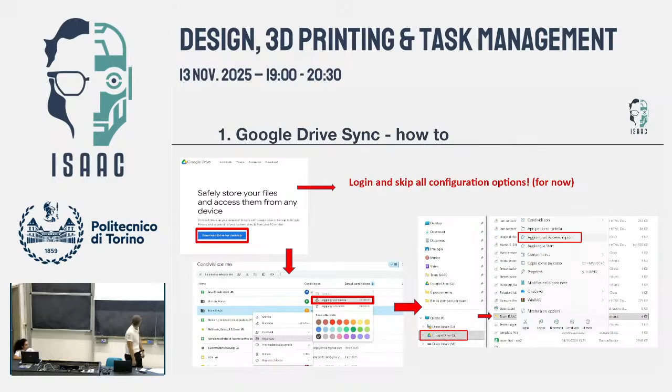Now that after this short introduction, let's talk about the mechanical design, what you're here for. I will leave the floor to Vittorio Giulimondi, who is the head of the mechanical department of the team. He has 2 years of experience, and we will try to explain something about mechanics.

Hello everyone. The idea behind this class was to help our new members, especially in the mechanics area, to understand a few basic concepts about working in a team in general and about designing for robotics, and also with a particular look at the 3D printing section.

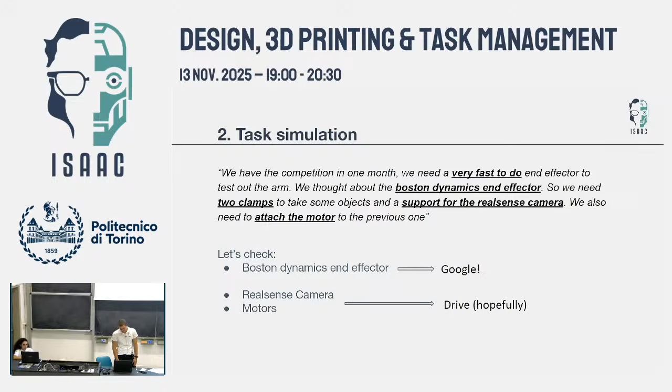So, why are we actually doing this today? As we know, Politecnico lectures have a lot of theory in them, much less practice. So once we get out of those lectures, we usually do not know how to solve anything. We encounter a task which might actually be difficult in the real world during your working experience in the future, and you will see that you actually do not know what to do. And that is perfectly normal, because no one has ever told you how to do this.

One example we always see is that once someone new comes into our team and starts designing parts, they never take into account the electronics part. As mechanics, we do not care about electronics most of the time, but it's actually essential, because without electronics, our robot will just not move.

So what I want you to get from this class today is for sure some tricks about SolidWorks that we will see, maybe ones they haven't shown you in the only course you do as a mechanical engineer or industrial engineer in general. I also want to show you what the actual workflow is that anyone has to follow to go from an idea to an actual product that you can print and use.

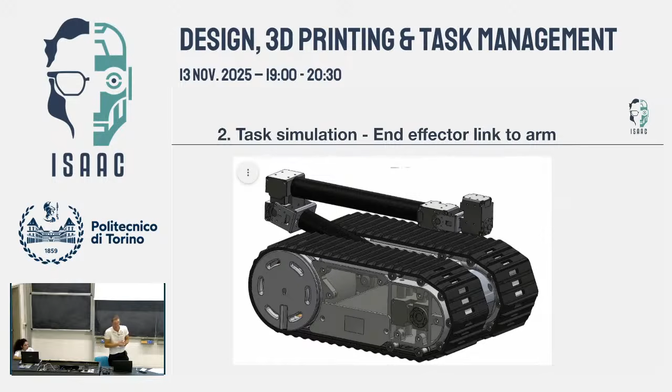I want to leave you also with this quote by myself: there is actually no Nobel Prize for mechanics. What does this mean? Most of the time we have great ideas that look incredible, but they are extremely complicated. The main problem is that when we have this kind of ideas, it's actually really hard to get a prototype because they are complicated, it takes maybe years to complete something like that, even if it's the coolest thing on earth. So what I want you to get today is to do something a little bit simpler that is working, to have an actual prototype working first. Then we can upgrade it to something incredibly complex that will grant you no Nobel Prize, because there is none.

Okay, why should you actually believe us? What we're going to say is just because we're students. I was just a student 2 years ago. I entered the team and made a lot of mistakes, a lot. The leaders before me corrected them and guided me to solve many of my designing problems.

What I want to give you is a little shortcut, okay? So you can have a look and solve some issues that might come up, so that in a few months or years you'll think back to today and say, maybe they told us something like this and it's going to save me a lot of time. I hope someone else did this in the past, but there was none.

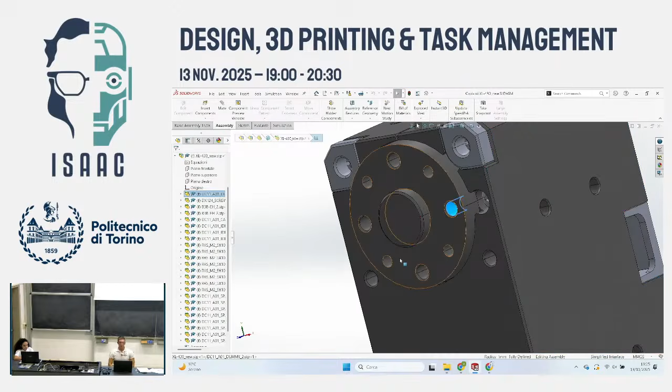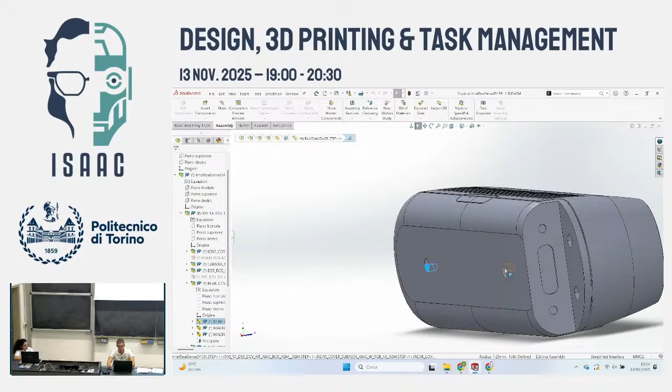So what are we going to do today? First, I'm going to give a very short tutorial about Google Drive Sync. This is something we use inside the team, so it's taught for team members, but everyone else can also have a look at it. It's extremely useful, especially when using SolidWorks. We will discuss it later.

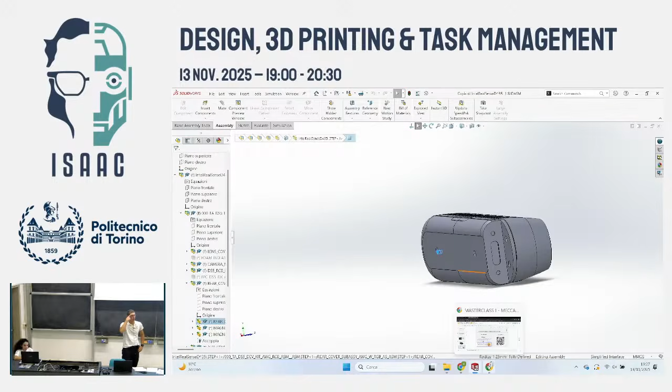But then we will also talk about the task simulation. As you may have seen in the email, we will design a simplified version of our actual end effector, and we'll see all the steps we have to follow to complete the task. Then in the end, we'll also have a little 3D printing overview, especially regarding tolerances, which is something not taught anywhere in the standard courses or lectures of Politecnico, so we can have a look at it too.

Oh yeah, this is the workflow. So about the Google Drive Sync, why do we want it?

Because when you're working on SolidWorks, maybe this has happened to you: if an assembly is composed of multiple parts, what happens is if I just send another member of the team my assembly without the parts, it will open the assembly and SolidWorks will say it can't find any of those parts, and will just open a blank screen.

So the fact is I can either send them the assembly with all the parts—and consider that our main assembly with the robot contains something like 2,000 parts—so it might be pretty heavy to send, or we can use Google Drive.

The fact is that to use Google Drive and access it on SolidWorks, you need to have it synced on your PC, which is something extremely useful and fast to do. So I'll give you 5 minutes and tell you how to do it.

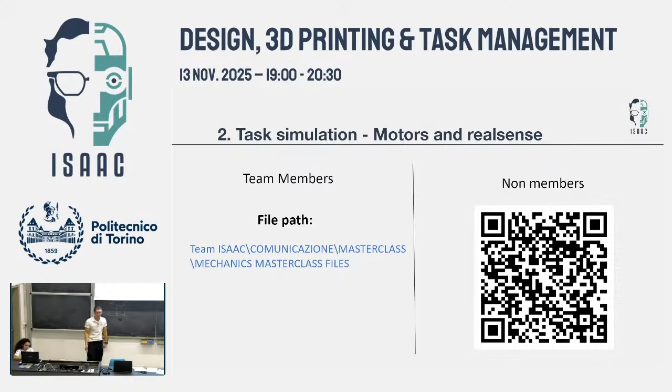Once you have downloaded Google Drive on your desktop, you will have it here outside your disk, and you can add it to your quick access for easy access, like I have it here. This might be useful for you, maybe also for today. So let's get into what we want to do today.

Task simulation. Every week we give tasks to the members, and this happened last week. We have a competition in 1 month. We need a very fast-to-do end effector to test the arm. We thought about the Boston Dynamics end effector, which we'll see later. It just has 2 clamps to take objects and support for the RealSense camera, which is our main camera for the robot. We also need to attach the end effector to the previous motor on the arm so we can move it around.

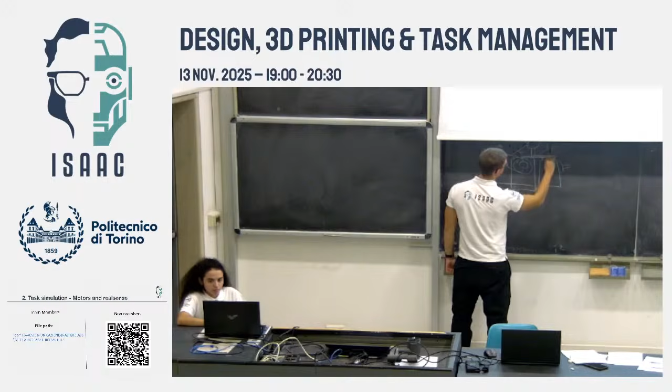So once a task is assigned, and maybe it is written somewhere, we also need to understand what we want to look at first, especially what we still do not know. Let's consider that I do not know anything about the Boston Dynamics end effector, the RealSense camera, and what motors we are using. So where do I find them?

It's pretty easy, I can just search the end effector. For the other parts used in the robot, maybe there is something on the Google Drive, or again I can just search them on Google. I can also find, if it's pretty famous, a CAD model of it.

So let's see, the Boston Dynamics gripper. Why did we choose this? Because it's extremely easy. It has a motor in the center part, and then it has 2 clamps - one fixed at the bottom, and the other one moving. So just the motor moves the upper clamp, and it's working. It consists of 3 parts.

It's extremely easy. Actually, we were designing a much more complex end effector by that time, and it would have taken much more time to complete. In 1 month we had the competition, so we thought, okay, let's do something much easier. This took like 1 afternoon to design, another afternoon to print, and it was ready.

So now, how are we going to attach it to the arm? We need to take into consideration that we have also a motor at the end of our arm. This is just for later, to understand how I'm going to attach it, because of course if I make a perfect end effector and I don't know how to attach it to the arm, then I have an end effector that grips things on the ground, which is okay but not useful.

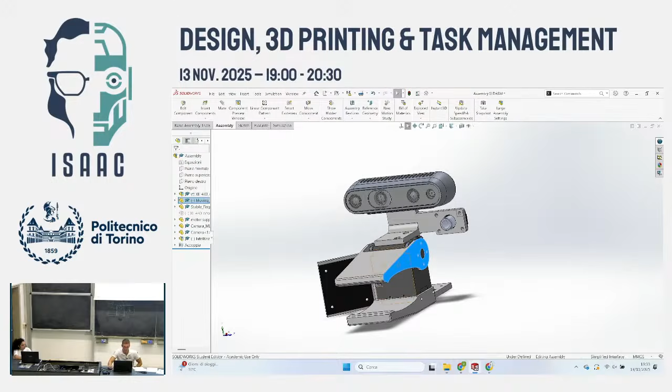These files just contain the CAD models of the motors and the RealSense camera. So you can see it on my PC too. For the team members, please just use the drive synchronization for once, so that I do not have to repeat it every week, okay?

So now, what are we actually going to do now? Are we going to make the 3D model, start modeling? Well, of course not, we still do not know anything. So the first thing we need to go and watch is the models of the motors to understand what they actually are. Let's see, I have it here already open.

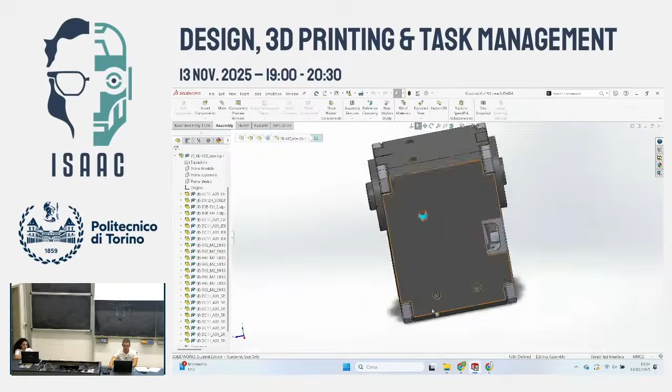This is our motor. As we can see, we have this axis of rotation here. It's going to rotate. I can see here that in these holes I can just put screws so that I can make something that attaches to it somehow. And how can I attach the motor to the end effector? Well, I see there are other holes here where I can put screws and so on.

Especially for the motor, it's actually pretty common to find something like this, which is even easier to use, okay? I also have it here printed.

Okay, so now we have seen the motor. Let's see, the other part was the RealSense. Okay, here we have our camera. It's pretty cool. How can I attach to it? Well, I have a big hole here and also another one here where I can put my screws.

So maybe I can use something like this. I don't know, but just to have a quick look at what we need to use. This is kind of essential. Okay, so now we have seen these parts.

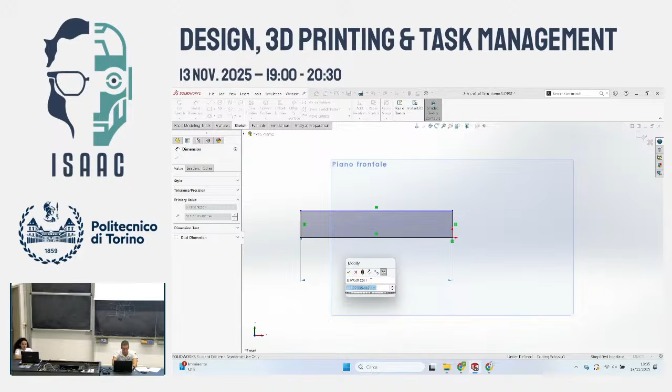What do we do? We start making the designs? Well, no, because we still do not know what to design. So what I suggest is that once you have a task assigned and you have seen the parts that you need, first you do a sketch. I know this might seem stupid because you can say, I have everything in mind, and maybe you're right, you have everything. But if you do not do a sketch, you do not think about things that I will ask you later. Okay, so let's do something.

Let's consider our motor. Okay, something like this, with our axis of rotation here, where all the holes are, okay, that we have seen earlier.

Okay, so now I need to make the fixed part of the clamp and the moving part. Where can I fix it? Okay, I've seen I have multiple holes here in these parts, so maybe I can put the fixed clamp on the opposite side from where I have my axis of rotation. So maybe I can do something like this, very similar to the one from Boston Dynamics.

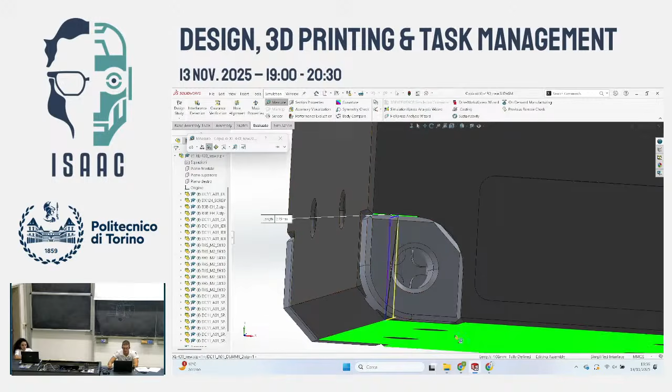And then I can do something that attaches to this other one. So I will do, not very good at drawing, but something like this, okay? I don't know. Okay, and then here we attach somehow, but we will see how.

Okay, so now these parts are done. I need to still attach it to our motor, to the robot. So I need, and also to put the RealSense there. So I can think about a way, where can I put my camera?

I can put it here. Maybe I can put it here. I can put it on the side. It's pretty big, so maybe on the side it's not ideal. We'll try and put it just on top of it. So we need to design something that holds it.

Let's make, for example, something like this, I don't know. And this will hold my RealSense that will be placed here. Where do I want to place it? Maybe a little bit nearer to the front, a little bit in the back. We can discuss it, of course.

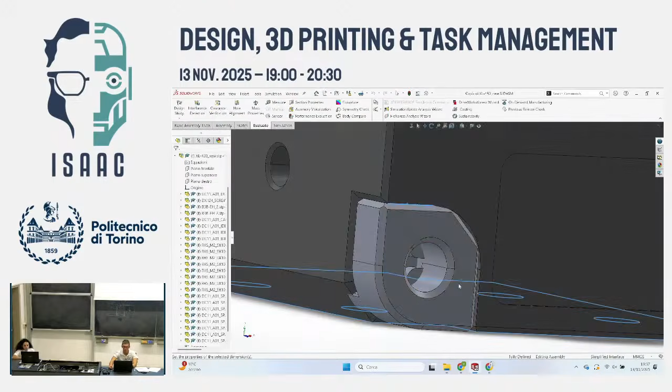It's not ideal. I can put it more in the back, but then if you consider also that the camera has a field of view, I don't know how much it is, but let's say 90 degrees, something like that. So I cannot see things here. And if I put it here in the back, then a lot of my view will just be blank space, and I will not see what I have in front of me, okay? But this is something we can check out during the design by making the part modifiable later.

So now, okay, we have done the RealSense. We need to find a way to attach it. We have seen that there was another motor here that was just something like this, okay, which had, I don't remember, but something like an axis over here that then attaches to something else.

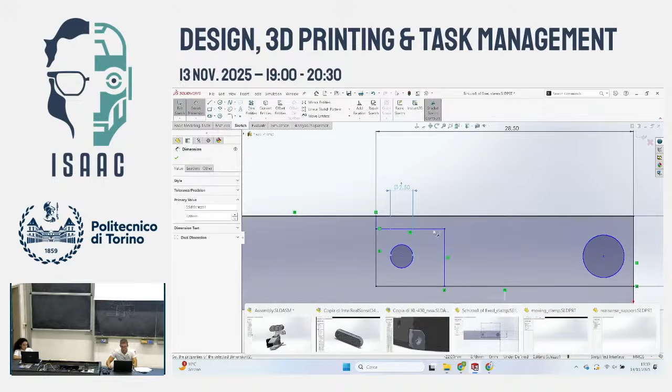So I can just extend this part as I've done and maybe attach it here with a few screws. Okay, what is, in your opinion, a problem with this design?

Okay, did you all see and take the QR code? I think, is there someone? Okay, so I will give you also this. I actually forgot to mention before, so maybe it's a little bit harder for you to guess, but have a look at this.

Think also about what I've said before about mechanics, not electronics problems. Any suggestions from the members? Maybe if I do something like this. No, something like this. Something comes to mind, which will be, I don't know if you see, this part here, if you see my mouse.

What are those? I forgot to mention, but those are the pins for the cables, all right? So the problem is that if we do something like this, then I have to put my cable inside. I mean, maybe it will fit because I can bend the cable a little bit. But for the electronics area, it will be hell just to make tests, put the cable in, put it out again, because your finger will just be too big for doing something like that. So what is the solution?

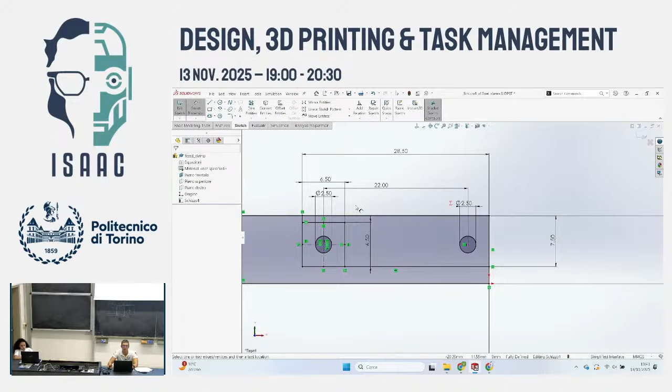So this is something you need to take into account, because if you do your design and think it's perfect, then you present it to the electronics area to work on it, and if you're actually working inside a company, they will just tell you you need to change it, because they cannot work on it. If you're working inside a team, they will just not work on it, because they don't like to, and you will not have an end effector. This is the long story short.

So we need to have a look also at what other areas might think. Okay, I think that for our first sketch, that is all. We can actually start modeling.

So let's start with, oh, by the way, I wanted to have a little spoiler about this: this is the model for our actual end effector that we have. As you can see, it's pretty simple, but it's functioning. It has a few more cameras, but we will do a simplified version of it today. So, okay, let's start with the modeling.

I hope everyone of you has done the course for drawing during your lecture. So let's start. I actually like to do something like this. Let's start with a sketch. One of the things I see most when I see other people doing sketches and parts is that they divide the part into a lot of sketches and a lot of extrusion cuts, whatever.

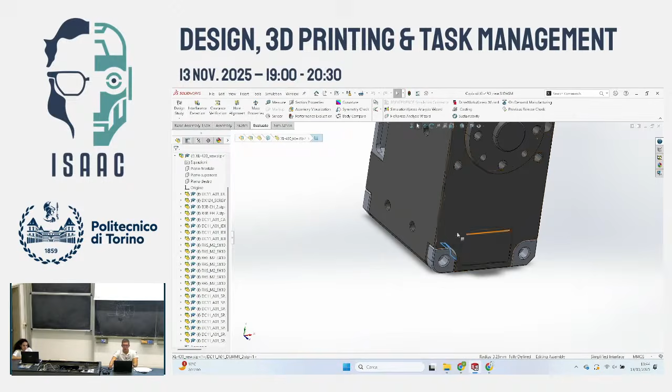Something aligned to the sketch. Okay, now this is easy. Let's start with doing the holder of the motor, the inside part. So we are actually going to do something like this.

Okay, how are we going to do this? Let's see from the motor. What is the dimension of this? How do I get dimensions from SolidWorks?

Maybe you have seen it during the course, maybe not. It's actually really easy. Either you click on things and see the length, or you use this tool, Evaluate Measure, which is extremely useful because you just click things and it measures it for you. Especially if you click on X, Y, and Z, it gives you all the coordinate distances.

I see there a normal distance of 6.5, so this line has to be at least 6.5. Let's do it, I don't know, 7.5, a little bit more.

What is this length? Again, let's use the measuring tool, or we can also use this. We have seen it, 28.5. Okay, right now I'm not considering anything about tolerances.

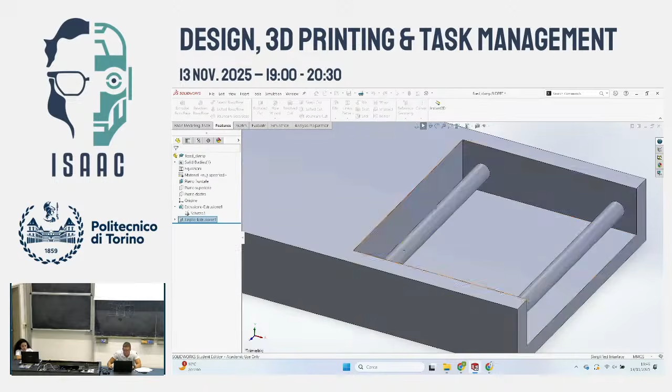We will discuss it later because tolerances change if you're doing a piece out of metal or you are 3D printing it, but we will discuss it later. So let's now consider these measurements. Now we need to make the holder for this part. We actually need to kind of copy all of this. Let's see, for now, this is a little bit easier.

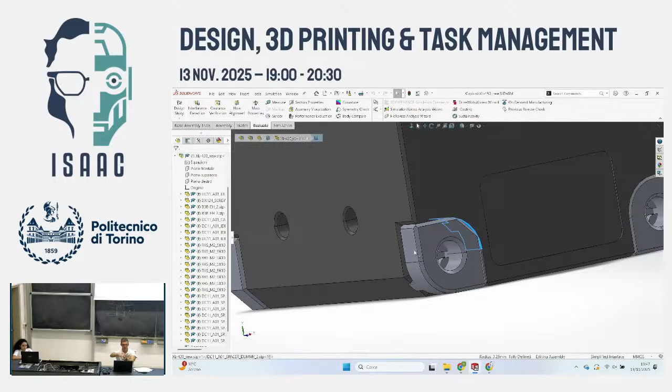So here I see that this is just a radius of 3.25. Where is it placed, actually? Where do I see it? Okay, here I see the place for the screws, 22 from the center. So I just need to make the holes.

And then I will also make this part. So how much is the hole? This is an M2.5 screw, so let's do 2.5.

And then here this was 3.5 radius, I don't remember, let's get it here. Yeah, it was 3.25, so this must be something about 6.5. All right, and these two.

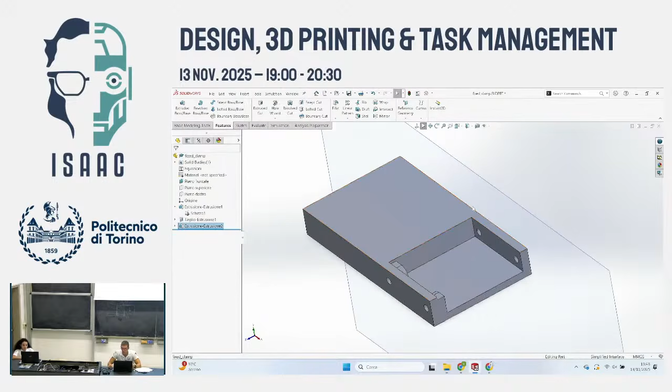Okay, so now this has to be centered. So how can I center this hole? I just put a line in the center of my square, and I click on it, and I make it coincident, right?

And then how do I fix it also on this side? I can both make a dimension, or I do the same thing here. Okay, now I have to make the same thing on the other circle. I could both make maybe a mirror of the sketch, or I can also use some relations and something that is called an equation.

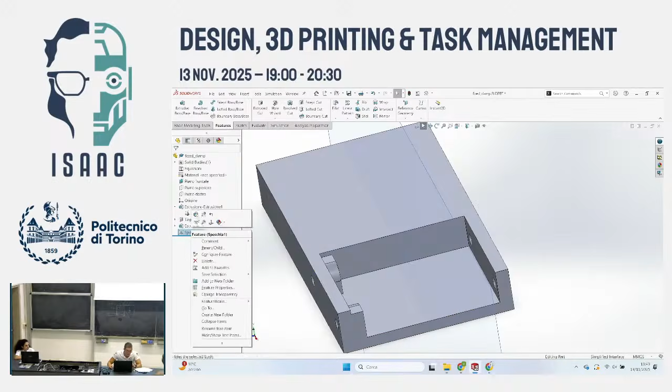So let's see about it. First, I want to have the same center of it. So let's do here, if I put it horizontal, it will be on the same line. All right, if I want a 22 dimensioning here, 22, all right. And then also this.

How much will it be? It will be the same as the other. So instead of putting 2.5, I can put equal, and then click on this quote. So in this case, if I want to change it, put it like 3, then it will just go to 3. 2.5, go back to 2.5. In this way, it is much easier to change the design of this clamp.

Also later for tolerances. So now, what is the difference here? Yeah, we have this little fillet here. So we need to make the same thing. As you have seen, it is 3.5, 3.25.

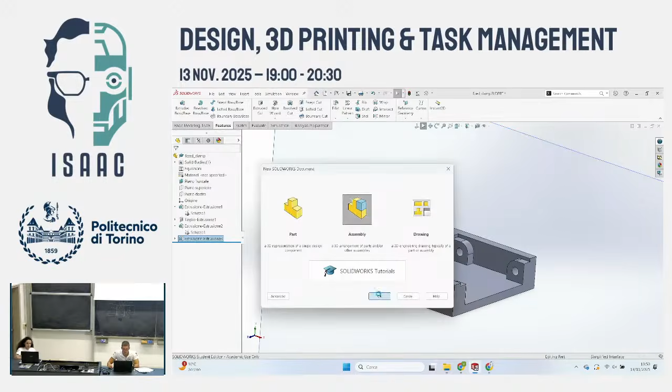So how can I do it? I can both make a circle on it of 2.5, or I can use this other function, which is extremely useful, I think, which is this fillet function. I don't know why it does not take it, but let's make 3.25. Okay, a segment, okay, problem? No, oh what, oh yeah, right, because this is not placed. So let's just do something like this.

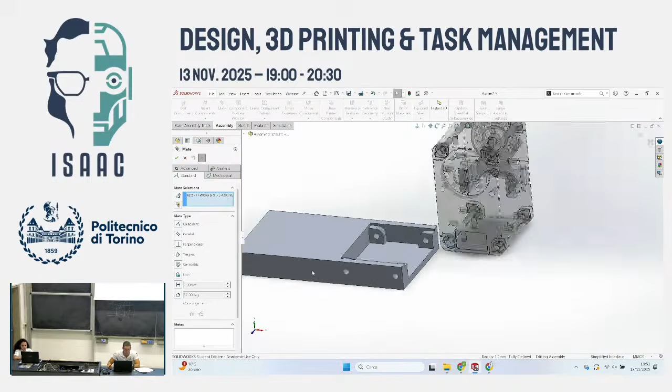That was something. 3.25, okay. I love SolidWorks. Okay.

Again, here I can use the function. This thing about function is something extremely used in a lot of cases because it can be upgraded to something much more complex. For example, it can be possible to have a text file outside of SolidWorks, and you can modify the values inside the text file, and all of the dimensions on your sketch related to the dimension of the text file will change accordingly. So it is something complex, it takes a little bit of time to do, so we will not see it today, but it can be extremely useful for us.

Now let's finish this. Let's use a mirror. So we need to first do something like this. Where is it? Here it is. Okay, so let's mirror it here, here, and here.

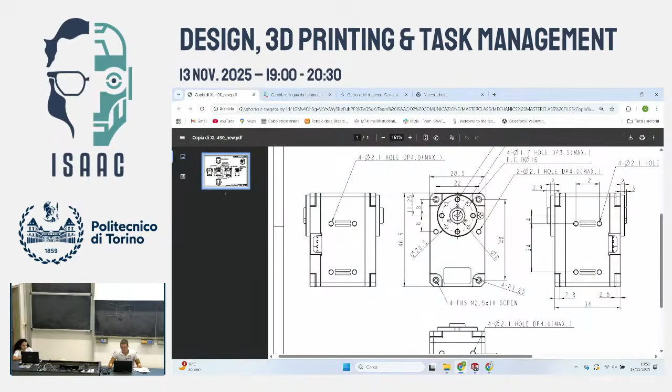Of this, right? Over defined. Why? This something? Oh, because I'm defining this two times. No? Where is it already defined? Oh, I'm defining this two times.

Okay, what I want to always get when I finish a sketch is this, what is saying here, that it is fully defined. Because once a sketch is fully defined, of course I cannot move anything about, if I touch things it will just change its dimension. Once it's fully defined, it means you actually finished your work on the sketch, and you can go in and extrude it.

So let's do the extrusion. As we said, this will just hold the motor on the side, and we'll have something mirrored on the other side. So let's think about it when we do it. But okay, let's make this extrusion. How much will I do it? I don't remember how much was the motor width. So this was, okay, this is 34. I don't know, let's start with 40, maybe.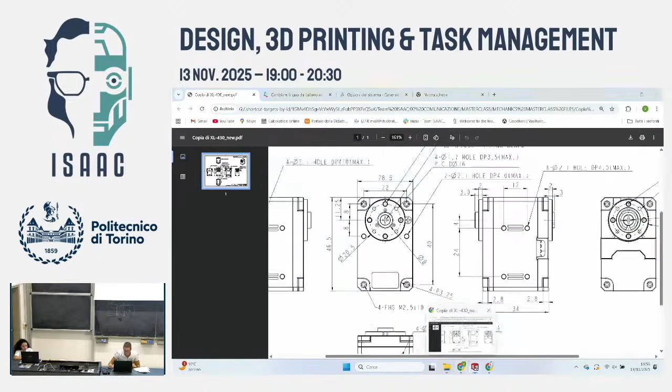I just need to add these little pieces. Let's take it from here, that I am actually going to eliminate, to give the motor a bit more structure so I can fix them together better. So removing them, I have to create them on this part again. So again, I go from my same sketch as before. I go to extrude, and I just select - let's do, here I change because I want to extrude them from another face. So I change.

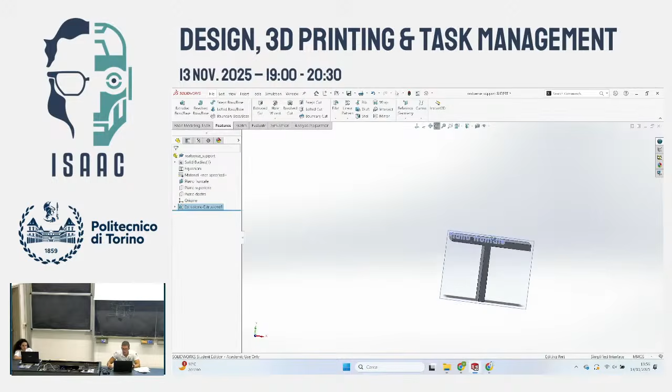I take this surface, I make a blind one from the other side, and I select the parts I'm interested in, so this and this. Now, how much is it? I don't remember, but here it is written. It's 2.8. So let's see, 2.8. Okay, so I have it here. Now it is the exact same thing on the other side.

I can just mirror this with a function this time. Just consider that to mirror a function, you do not need a line, but you need a whole plane. So let's go to the mirroring, which is here on the linear pattern. So I have the mirror face, which is this. It's not selecting it.

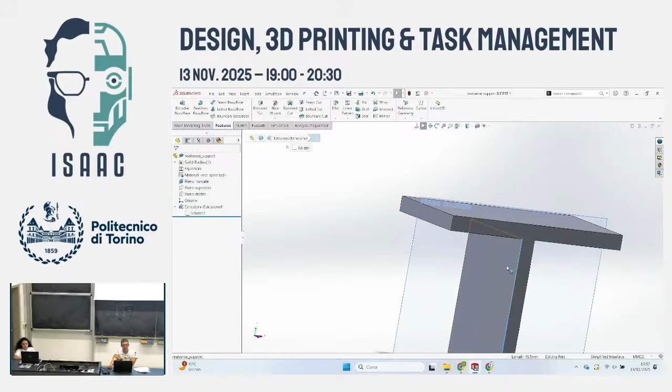Thanks for the help. Okay, now we can just select the parts and mirror it. Easy. Easy. Not mirroring it. Partial preview, full preview. Geometry. Why not? Any idea?

Makes sense, okay, I will just copy all the faces. If you can never use SolidWorks in your life, in fact, in a company you will not use it, but...

But why is it not? Oh, Dio, I have another idea. Cancel, okay. I didn't want to do this, but they are actually forcing me to.

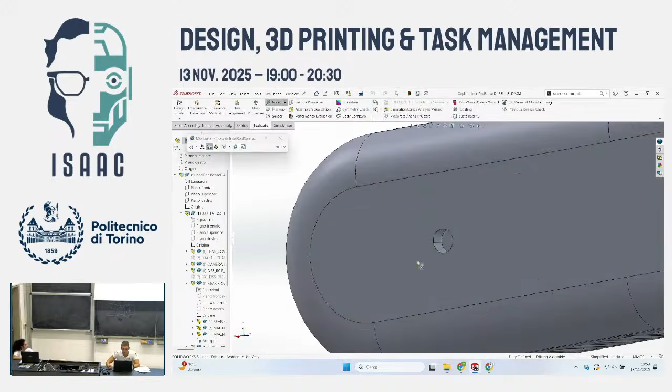So let's get again the sketch, extrude it, and... okay, let's see, okay. Now we have our part. So we can, what time is it?

We can move on and do another part, so maybe it's better if we first do an assembly. So let's make a new one, an assembly, to see if everything is working.

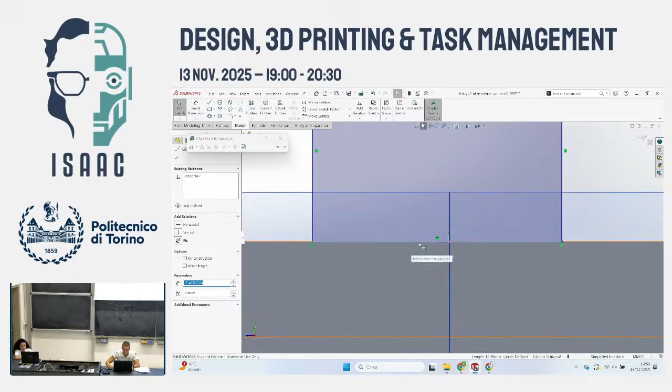So I take the fixed clamp in here, okay, and I also need my motor. So I insert a new component, and I need this. All right, yes, let's remove these parts. I don't care, okay, so let's make some mates very fast to see if everything is working right.

And it looks like it is. Okay, so what we want to see is that the holes are actually centered, because most of the times we just click something and we make some holes that are a little bit placed off. But now everything is working.

Of course, there are no tolerances, so this is exactly perfectly fitting the motor. But again, we will discuss it later with the printing files.

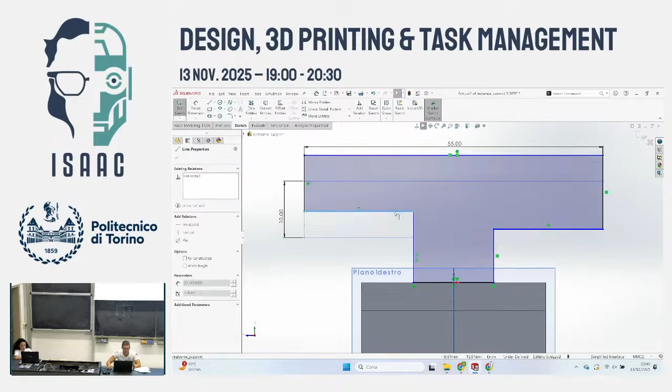Now, we do not have a lot of time, so I will skip the upper clamp, the moving part, but it's actually pretty easy. As you can see, if you have done this, it's actually easier, because it's something like this, so you just need to make the holes here to put the screws inside. So it's actually kind of the same, even easier, I think.

What I want to do is the support for the RealSense. Then maybe it is easier, but it is actually pretty interesting for tolerances and for another feature, which is actually the configurations in SolidWorks, which is pretty cool.

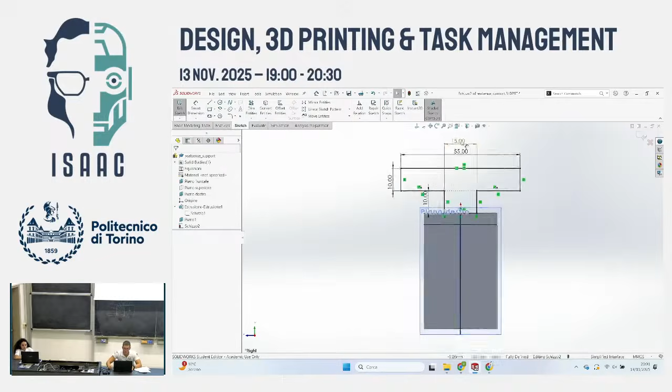So again, let's do our sketch. Okay, let's start with, I need to remember the dimensions again. So this is 28.5 here. And on this other side it is 34, okay. So, yes, it's okay.

So we'll just get, I mean, as we have seen it before, it would be something like this. Okay, this would be something of it. Let's start adding the dimensions to it.

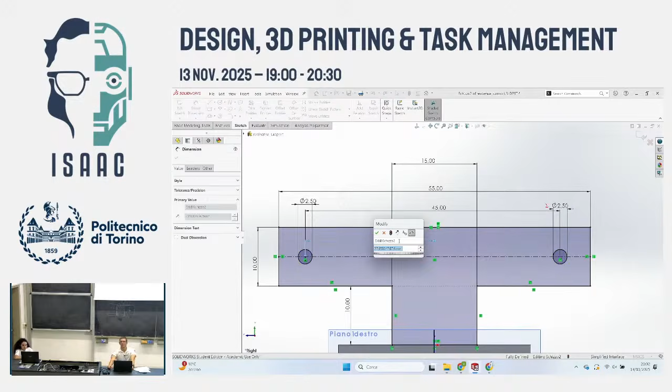28.4. On this other side, it was 34. Okay. Again, here it goes down for at least the height of the motor, let's say. So it's 46.5.

Okay, now this is, let's make them collinear. In this way, I don't have to make more dimensionings. So now, maybe I don't know what else do I need to dimension. I just click the parts in blue, I move them, and so I understand what is the problem. So let's do with the dimension.

What actually is missing here is the thickness. Now, thickness is something that is really hard to guess at first, especially when you are not very familiar with 3D printing, because you're thinking that 3D printing, you print plastic. So plastic is something that has not a lot of strength, which is true, but it depends. What are we going to use this part for?

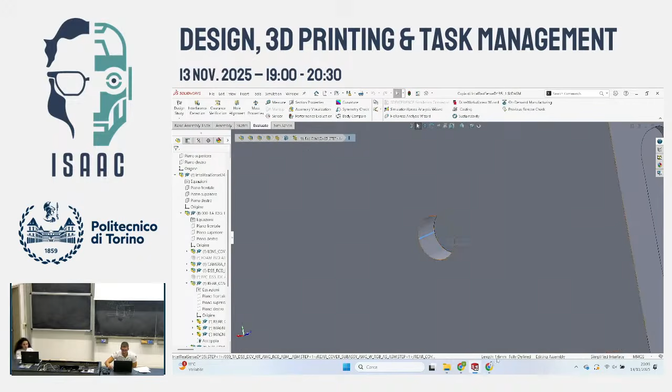They're going to fix two motors together. How much strength am I thinking they will get? Not extremely much, even because if you need to make a component that has to be really strong, you do not make it out of plastic, you make it out of metal. So everything will change. So how much will you do it?

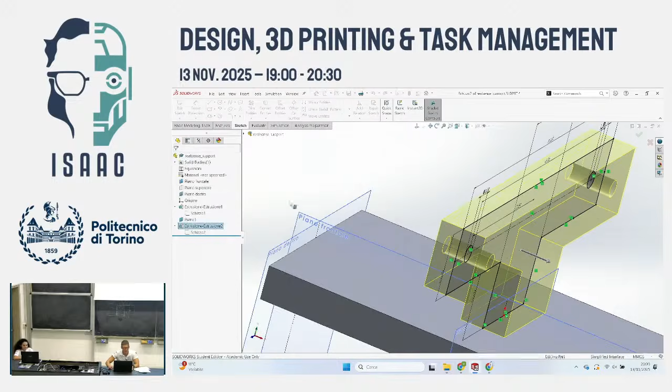I mean, I see people that do something about like 5 millimeters of thickness that might not look much, but this is kind of something like maybe it's 1.5 centimeters, something like this, and I cannot break it really easily, and it's out of plastic, okay? So for something like this, I will put something like 5 millimeters. It's pretty fine. It's not much, so if I apply a lot of force to it, I will break it, but I hope I will not.

Okay, what is missing here that it's not defined? Here, no? The thickness is here. You're seeing something that's not defined. This part is not defined, yes. Yeah, of course, yeah, that is exactly what I want him to do. So let's put it vertical, okay. So now this is fully defined. I can move on with the extrusion.

How much do I want it to extrude? Well, let's see, it depends on how much the motor length. So here I can see, where is it placed? Here, 34, right? We've seen it before.

So let's extrude it again. Let's put a mid-plane, 34. Maybe we'll make it a little bit less later. Okay, we have something like this.

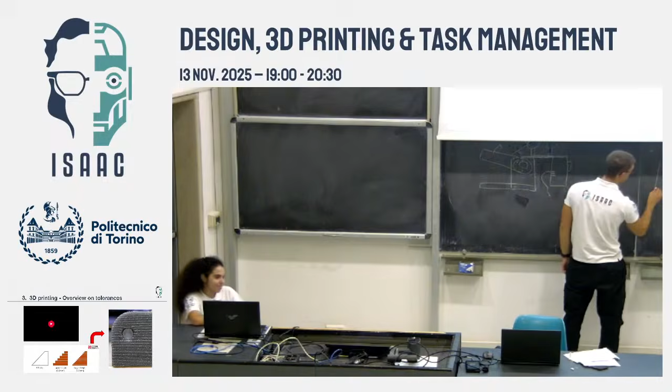Now we can do the holes, but first I wanted to have you look at something. Did I forget something here? Yeah, probably - if you watch the sketch, it's a yes. I forgot to put the holder for the RealSense, which is the reason why I'm doing this. I could have done it on the exact same sketch, but instead I want to introduce the configuration system in SolidWorks, which is extremely useful because it lets you turn on only some functions instead of others.

Let's see what I mean by it. So let's do the RealSense holder. We've seen we have these two holes, and we want something like this, so that the RealSense is pointing towards the clamp.

So the fact is, where am I going to put it? We were discussing it before, and we still do not know. So I will put it here in the front, on the back, in the middle - I don't know. First, let's see where the plane is.

Okay, but we need a sketch. It's not just a function that we can make as large as we want - we need a sketch, and a sketch needs a plane. So first we need to define a plane, by defining the geometry, and we will make it parallel to this other one.

Let's put it, I don't know, here seems fine. So let's start designing it - with a sketch I start doing it. Oh, it's on the back, well, it's fine. So how do I do it? Something like this, I don't know.

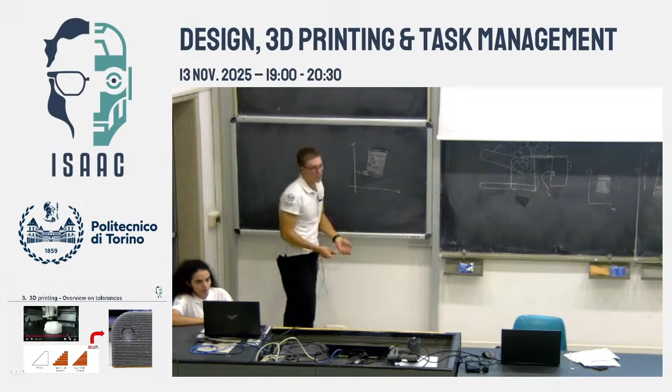So let's go back to our sketch. It was 45, so I need to make it a little bit larger - I don't know, 55, something like this. Then I will center it back. So let's center it. We want something like this.

Oh yeah, I didn't center this too. Where is it? Okay. Oh, is it center? Coincident? Oh, no, right. Okay, now I can put the mirror again.

Okay, so let's do this fast because it's a little bit boring even for me. So this is something like this - again, horizontal. My PC is lagging a bit.

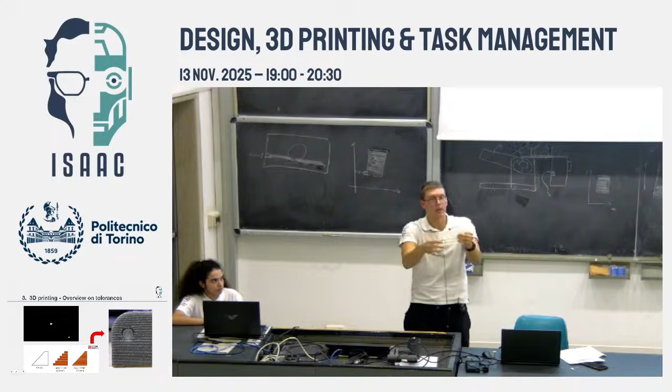Okay, so let's do it again - 2.5, this is 2, equal to this other one. They will be on the same line, and again the distance will be fixed. Yeah, coincident. And so also to this other one.

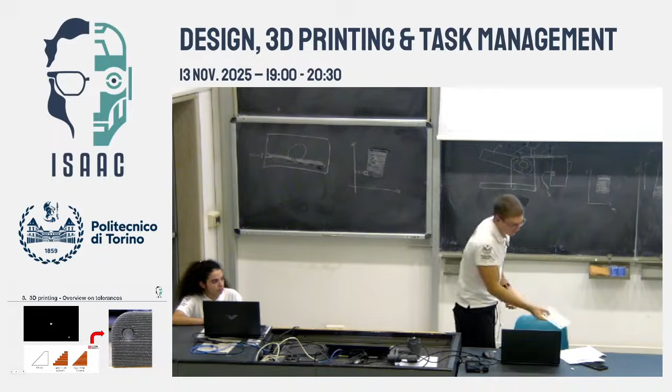So this was 45, if I'm not mistaken, which means that if we want to make it, oh, I can do it like this without a line - it's 22.5. Right. Okay, fully defined. Let's go.

Now, the thickness of this - well, it just needs to hold the camera, which I know weighs about 100 grams. So I will do 5, but it's still a lot - we can even do less. It actually depends on the type of screws we have, because you need to consider that inside the camera, there is some depth. Let's measure it like this.

It's 1.6 millimeters. So in our lab, we have screws that are M2.5, I think 8 millimeters. So it means we have to make a thickness of about 8 minus 1.6 - like 7 millimeters, something like that. No, sorry, 6 millimeters, something like that.

7 millimeters. I mean, I don't know how to count things, I make ChatGPT do stuff. I don't know. Okay, but anyway, so yeah, it's pretty thick.

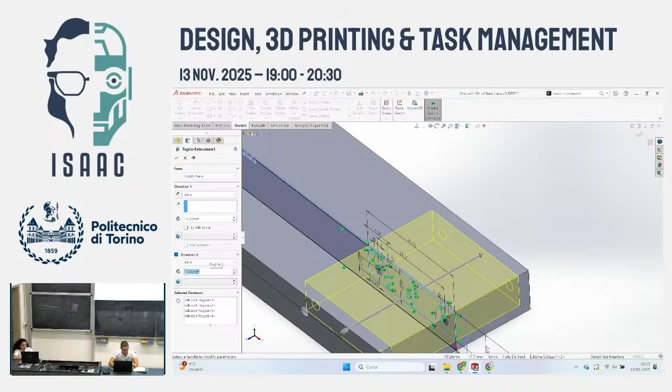So the idea is that when you design something, you want to make it as modifiable as possible. It must be really easy to modify, not just by you, but consider that maybe someone else will work on that file, and it has to be easy to work on. Okay, this is the general idea.

Now, let's go to the tolerances, which are much more interesting than this. Let's get to the PowerPoint. Okay, has any of you any experience on 3D printing? Kind of? Yeah, someone? Okay. How does 3D printing work in general?

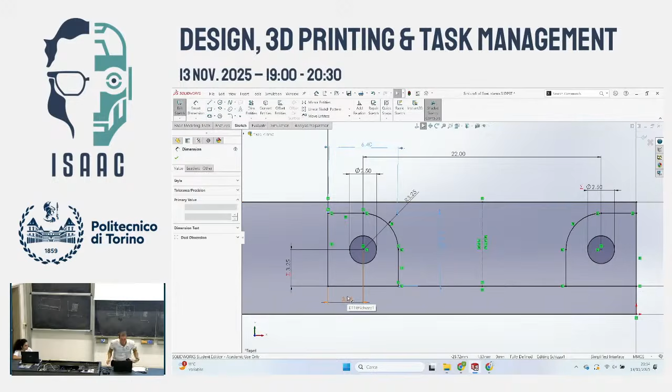So my printer will start to deposit layer by layer, on the top. Not only on this, but here I'm looking at, this is the z-axis, okay? But if I look at the plane, x, y, so I'm looking at it from the top, I will have the same thing, right? I have my, it's not a cube, it's a parallelepipedo. And you will just have the same thing here.

The fact is, just consider something like this. My printer will start to print, will continue, and then we'll arrive at something like this, all right? What does it do? It stops, or it goes one more?

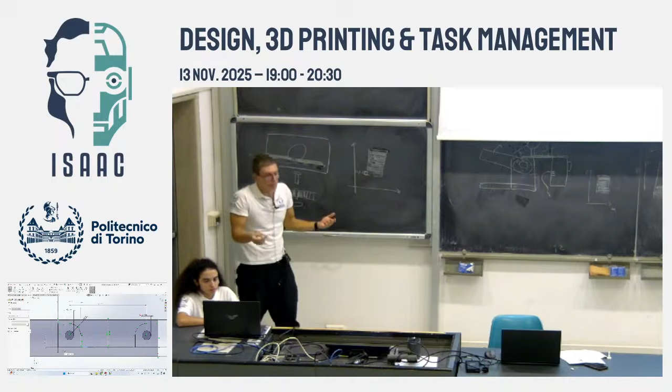So also for the registration, what I'm doing is that I have something like this. I will start printing it with my filament. I arrive here, and I have all of this part that I don't know what to do. Now, what will the printer do? It will fill it this way, so that it will have actually an extra part here, or layer.

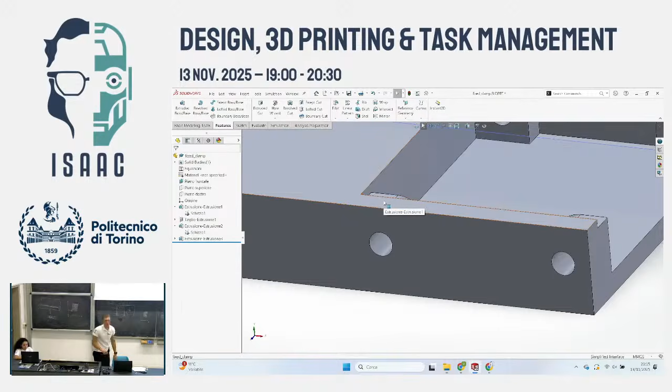So I will have a tolerance here, more material than I actually needed, or we'll just leave it blank, so I will have less. Now, you can know it by making some tests, but it depends on how the printer was actually coded, okay? Depends on the software of your printer.

So the fact is that we need to take this into account. Now, consider that each printer has a nozzle size, which is this part here, which is actually the part that you see depositing. This is actually the height of the layer, but it has also another kind of dimension. It just deposits filaments of a width of, for example, our printer goes from 0.2 to 0.4 millimeters, which is low, but is not actually that much low if you think about it.

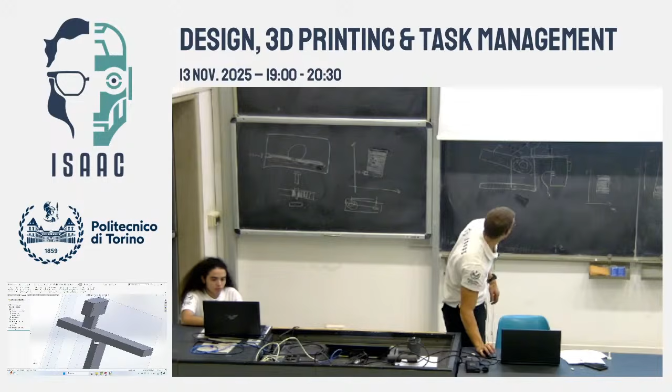So my printer will start, okay, we'll do it here, no problem. But then it comes here. Where do I stop? Okay, do I stop here? Do I stop here at the center? Do I stop at the end? So I actually have something like this. I do not know, okay?

I just have to test it because it depends on the printer. I can make some modification, but again, I will not have something perfect. Now, this is very low, okay, this is 0.2 millimeters. But still, if I want to have a perfect circle, I cannot have something like this, okay? It actually depends also if you are printing something on one side or the other. So I'll give you an example. This that we have right here is a hole tolerance tester, right?

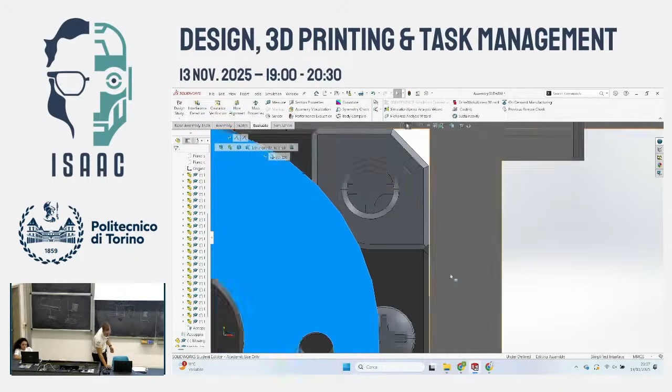It's actually pretty useful and common when we want to print something in 3D. This was printed horizontally, meaning that is the plate, and the printer went like this. What is this useful for? Because here there is actually written all the diameters that were designed on the printer.

For example, if I have this shaft and I want to get a hole for this shaft without much interference or play, I just get it inside and try and see which one fits. Let's see here, this is 9.8 millimeters, it gets a little bit of interference.

No, sorry, this was 9.6. This is 9.8, it goes through pretty smoothly. At 10 it's a little bit loose, kind of a lot loose. This was probably designed at a 10 millimeter diameter, so if I design a hole at 10 millimeters it would be too loose. But if I say I'll design it at 9.6, there's a lot of interference. If I want something right, I can do it at 9.8.

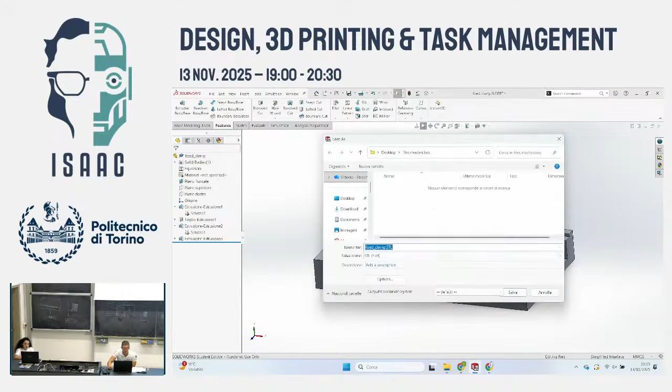So this is something, but this changes, because if I print something vertically, we have another printer, I do not have it here, but that one prints vertically, and the shape of the holes, and not only that, the actual diameter will change.

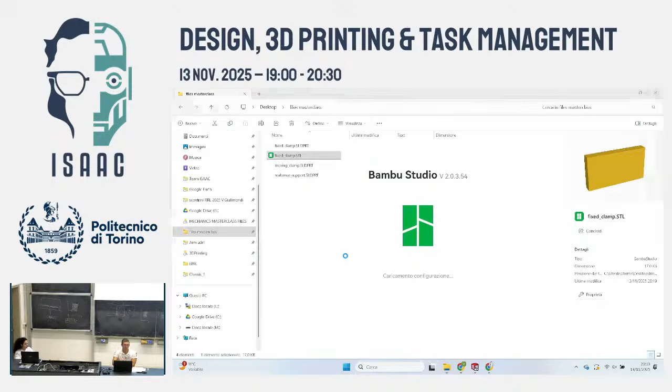So it means that maybe if I print something horizontally, 9.8 was right, but if I print it vertically, usually our printer makes holes a little bit smaller, so maybe it is needed 10.2. So I don't know, I have to test it first.

And usually, in fact, the very fortunate thing about 3D printers is that plastic is not expensive at all, so you can make tests and make a lot of mistakes and it's not a problem. But again, we need to take that into consideration.

So, for example, let's see in our designs, what do we need to change? Oh, and by the way, of course motors also have tolerances because they are manufactured.

But we assume that they are manufactured by a company in an industry, so they have kind of a zero tolerance in respect to us, they do not have a 0.2 millimeter tolerance at all. They have much less tolerance, so you can assume them to be almost perfect. Otherwise, if you need to make something extremely precise with metal, where tolerances can go much lower, you need to take that into account too. But for today is not the day.

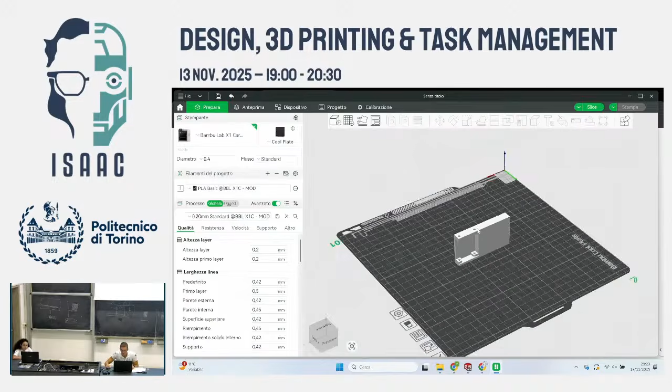So let's see our parts. In this part, what are the parts that we need to consider for tolerances? We've said the printer might do things a little bit wider, a little bit smaller. In our case, the printer tends to do things a little bit wider when it prints, because also the filament will lose a little bit when it flattens, so it will occupy a little bit more space.

So let's consider that we have designed this, that will be exactly 34, right? Yeah, 34. But maybe it needs to be a little bit wider. Is that a problem? No, because we just need to modify this a little bit. So this was 17, how much tolerance do we want to put? I personally use the tolerance of the nozzle. So if I know the printer is printing with a tolerance of 0.4, the nozzle is 0.4 millimeters, I try and add this 0.4. But again, it just depends on the printer, you need to make some tests. In this case, I will put like 17.2 and 17.2, which adds to 0.4.

Now if I have defined well all my functions before, there will be no problem, no issues in changing things also on the sketches. Otherwise, if I've defined them poorly, it takes much more time to change things.

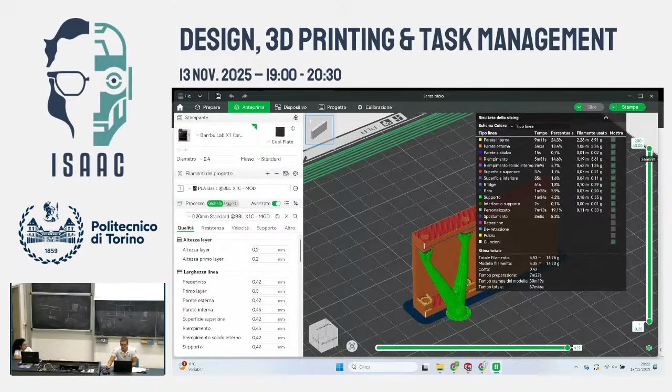So let's go, for example, to the sketch. Where would I want to define? I will not do it because we do not have much time, but consider that this part might be just a little bit bigger. So let's do it, this takes nothing. I want to put like 6.3, maybe, or add 0.4. I don't want to increase it too much. This, let's do something like this, which is better. Okay, so I gave these tolerances on this.

Also consider the holes, because you need to think about how a screw is designed. I'll do it here. I have my hole, and I will print it. So let's consider that my printer does something like this - it will overlap it a little bit.

So this will not be 2.5 millimeters, it will be a little bit less. Now this is exaggerated, but still - if I have a screw, an M2.5, it will just not get inside. Or better, it will get inside, but you risk ruining the hole.

Which is actually something you might look for, because if you have a screw, on the other side you need a nut to block it. But if you don't want to use a nut, say you want to block something that weighs nothing, you can just use plastic. So I can screw this inside the plastic, maintaining a 2.5 millimeter hole. Consider that the printer will actually do maybe 2.3, so the screw will get inside and fix itself without the need of a nut.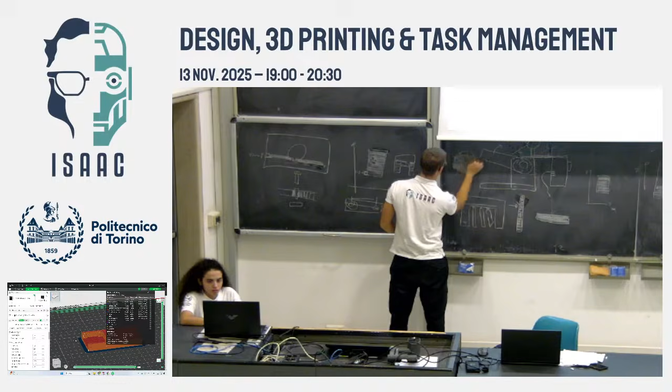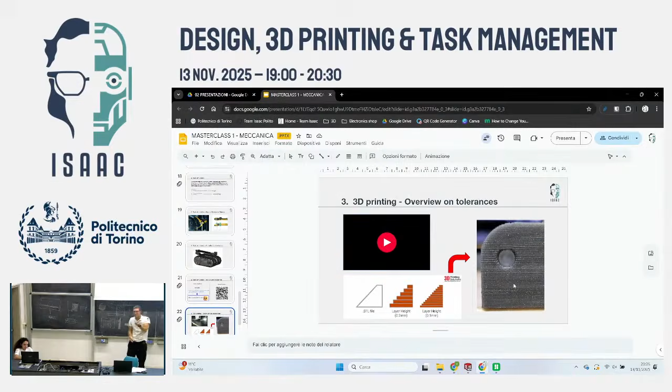So also for the other piece, the same thing applies. We did not make the holes here yet, but also for the camera I will have to change the holes, or for where I'm going to put the motors inside here. If I make this motor really close to the other wall, like let's see on a part that's been done, here, I need to consider that there must be a little space. Let's see if there is some - yeah, really a tiny little space.

It's not much, but it's needed so that when you build everything up once you've printed it, it actually works. Otherwise, you need to print it again. And it's not a problem of plastic cost, because something like this costs maybe 30 cents, but it will take like 3 hours to print again, so you have to wait a little bit.

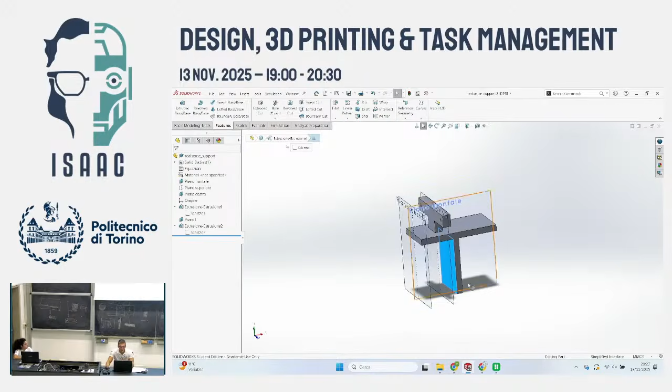This is actually kind of the end. Oh, I have this time. But okay, so the fact is now, we have 10 minutes still - I will show you what we have to do to actually print it.

So, of course, when we save this part, we save it in a SolidWorks file, or whatever program you used, but most 3D printers will not read this kind of file, so you need to save it in another way. There are multiple file types that can be saved, either STEP files, but we usually use STL, which creates a kind of mesh of the object, so that then in the 3D printer program it can create the code for the 3D printer to follow.

We will see it just now shortly. Okay, so let's save it. As you see, it has created that mesh. And let's go from here.

We can open it. We have a Bambu Lab printer, which is actually pretty decent. Actually, the tolerance that I told you, 0.4 millimeters, is extremely low. Just consider that this is one of the best home printers you can get. So it is slow.

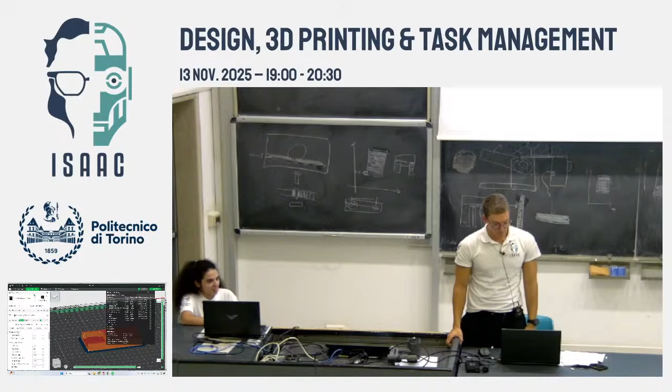Okay, so we have something like this in here. Okay, now, how are we going to print this part?

The fact is that you need to take into consideration that the printer goes from the bottom to the top. I'll show you the video again. It starts from the bottom and goes to the top. So if you have a roof, then you cannot print.

Let's think about it: if we have a very large 3D printer, we want to print this room. Okay, impossible, but just consider something like this. We can print the walls easily if we print it like this. The stairs are not a problem, but the roof is a problem. We do not have anything to print on, just an empty space. So in this case, we can see there is this problem: this part is not resting on anything.

Now, the filament has this kind of property: it can print something over an empty space, not much. It can bridge a little bit between two spaces. So for example, if I have something like this and want to print this part, if it's not too much of a width, it will print it, no problem. It will just go here and on this other part, then go straight. It's not a problem. But if it is too much, it will not do it.